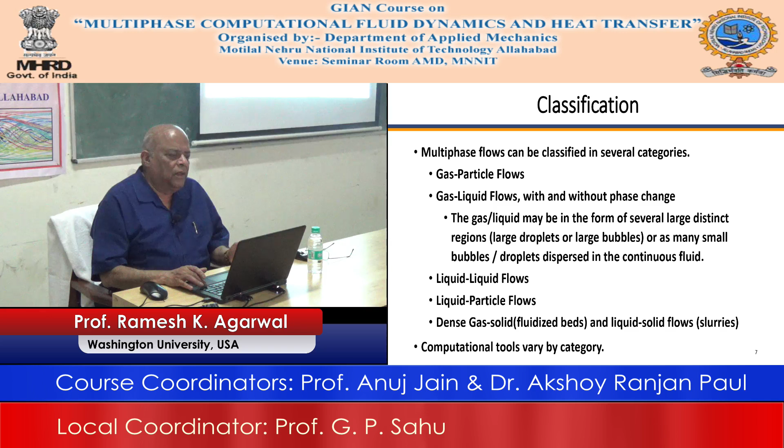Again, some of the terminology that we covered yesterday in lecture 3, including the dimensionless numbers. Some of the numbers that I mentioned to you we will be using today. Reynolds number is the most important in the whole of fluid mechanics for single phase and multiphase, and the other important numbers are the Morton number, the Bond number, and the Weber number, depending on what the calculations are, and the cavitation number if it is a cavitating flow.

So now I will try to not go over this, but the important thing again, if you remember, we spent some time on whether there is a one-way interaction or a two-way interaction. That is a very important thing to remember when you are applying the code, or there is a four-way interaction. Okay. So suppose you have a particle, and I gave you the example of a nanofluid. In the classification of multiphase flow, what kind of interaction was it?

It was a one-way interaction, which means that the particles of the nanofluid were so small in percentage and so small in size, they were in Brownian motion, that when they were moving around, only the hydrodynamics was responsible for what is happening. But the influence of the particles on the hydrodynamics was not accounted for. The particles were influenced by the hydrodynamics.

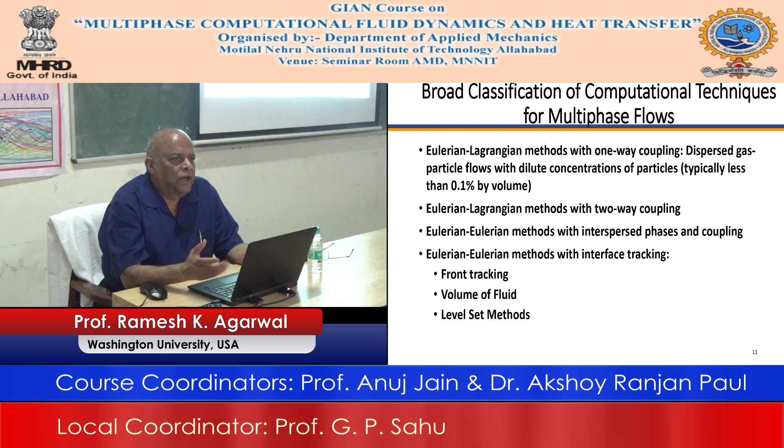Okay. Then, as I said, you can have hybrid methods, you can combine the level set with the VOF and so on. Okay. And of course, somebody had mentioned the lattice Boltzmann method. And then there is a method which has been developed, and some of you might have come across it in some other applications, which is now also a part of Fluent. It was not there before. It is called the grid-free method. So, in the context of multiphase flow, this is called smoothed particle hydrodynamics, SPH, and it's also in Fluent. Okay, and if you want, you can use it in some cases.

The lattice Boltzmann method is not a part of Fluent; it's not there, but people are writing a lot of research papers, a lot of work, and there is a company called EXA, and EXA has a software. It's very expensive. That has a lattice Boltzmann method for single and multiphase flows. Okay, so that is the only software that is using the lattice Boltzmann method. It's very expensive. So I am not saying that you should be doing that, and I think for many of you to learn the simple lattice Boltzmann method will take you some time, unless somebody is offering a course in that area.

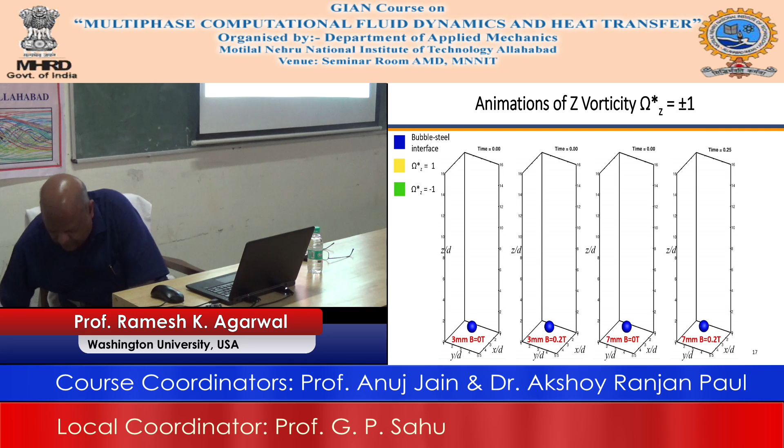So the Morton number is given by the rho of the liquid minus rho of the gas. But suppose it is air and water, it's 1000 to 1, you need not worry about the gas, all right. So it's basically density of the liquid times the gravity times the diameter of the bubble squared divided by surface tension. Okay. So surface tension forces versus the gravitational force. The other one is the Bond number. No, this is the definition of the Bond number, by the way.

And the other one is the Morton number, which is g times the viscosity of the liquid, not the bubble, to the power 4th, divided by the density of the liquid times sigma to the power cube. So anyway, that's not important. The important thing is that these are the two numbers and they are related to the Weber number. And so if you go back to our presentation number 3 or something like that, then you will find that all these are given. There are a lot of numbers, all right. They are difficult to remember because we don't deal with these numbers that often.

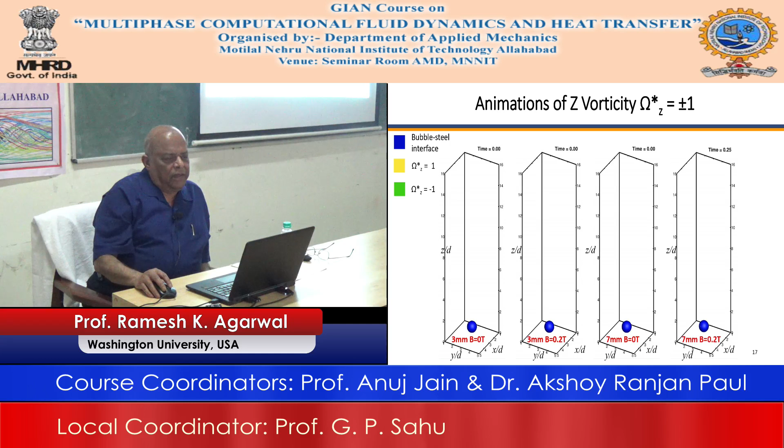If you don't know, they are like a potential and streamline. Those of you who know fluid mechanics know that the potential lines are always normal to the streamlines. So similarly, the electric field, at least in the axisymmetric case, is always normal to the magnetic field. So in this case, the electrodes are going like this, so current is going like this, and so the magnetic field is perpendicular to the screen or the board.

But what you see here, which is more important, is that as you increase the magnetic field, the size of the bubble as it is rising through the molten steel has become very small. This is just a very simple modeling, but in general, there are hundreds of thousands of bubbles there. So by applying the magnetic field, you can control them. So now the manufacturers are using this method.

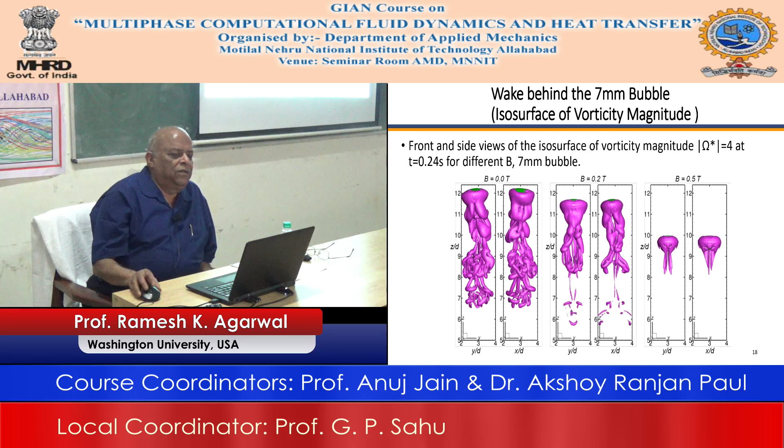That was a 7 millimeter bubble, and again you can see that as you change the magnetic field, there's tremendous impact. These are all blown up pictures, but in actual practice, when you have a large number of little bubbles, it does seem to make a difference. Okay, this is one example. Now let me show you another example.

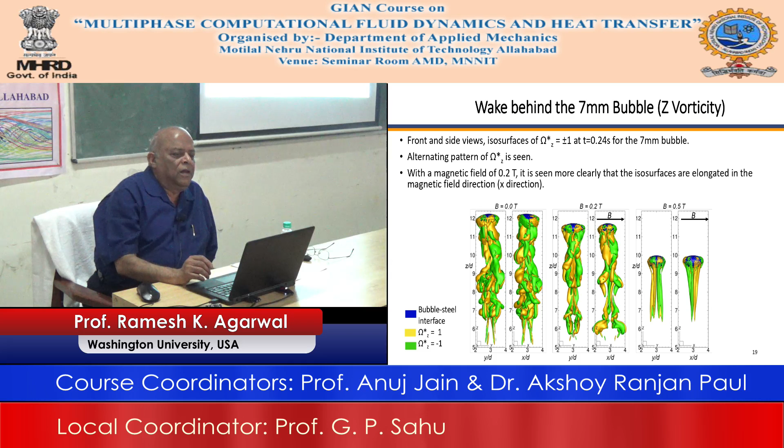And there are two Reynolds numbers that come into play. One is the bulk Reynolds number, which is based on the width of 48 millimeters here. And then you have the bubble diameter one, 216, which is a very small number. And this is this. So now, again you do the calculation.

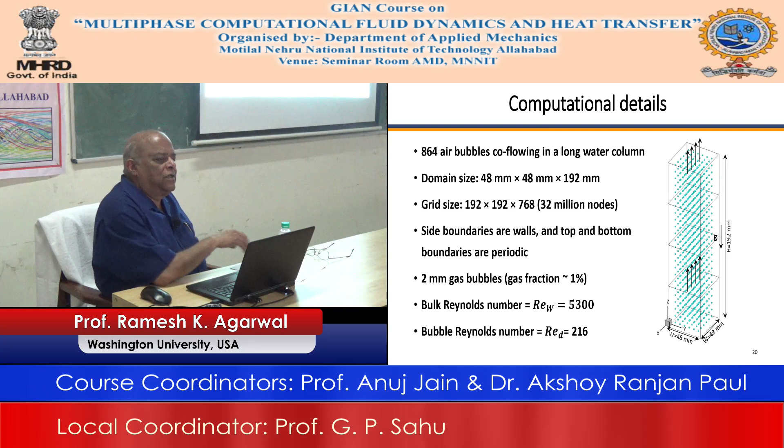But what you find is the difference between unladen and laden flow: if you have a laden flow, which means the particles are there, then the behavior of the bubbles can be totally changed. So you can completely change the physics in the case of the formation of steel ingots and removing the bubbles. So it's a very practical and important problem that you can figure out with simulation. All right. So it has a lot of merit.

And in the other case, you can sprinkle some particles randomly to make the flow a laden flow, and those particles can make the bubbles inside the flow behave completely differently. So all these are practical effects depending on the application that you're looking at.

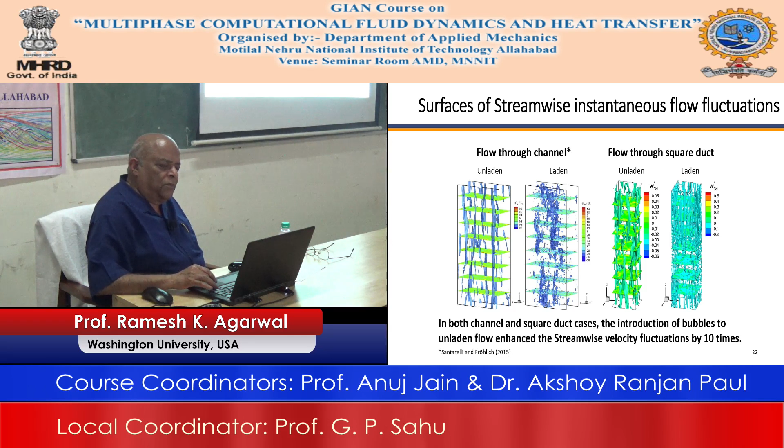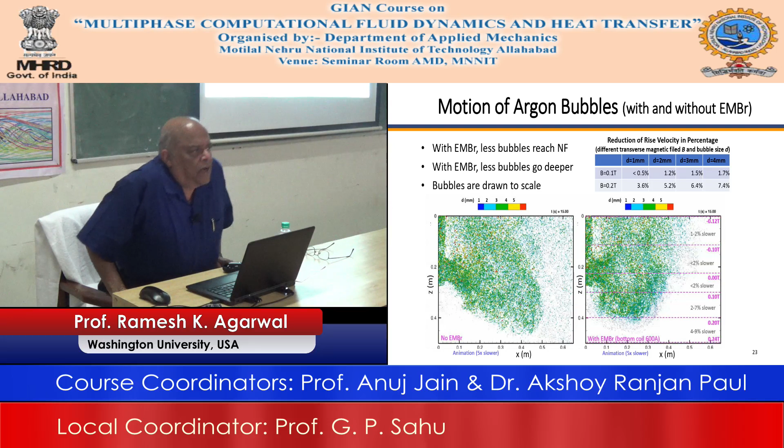So I think these are motivational examples of how in various applications you can do some really useful things. I showed you a few of them, and they are all done with the help of Fluent. Now, by the way, a few years back, Fluent did not have the capability of magnetohydrodynamics, so you couldn't do calculations that require electric and magnetic fields, but now they have it. So as they are building up the capability, you can do it.

Okay. So somebody was asking me today, can I do all this in the open source, not what I am showing you? And I said you can do anything you want. You can start from scratch and build up the code. It depends on how much time you have and what your motivation is. People can do anything they want, but remember that there are certain limitations: there are only 24 hours in a day, and you have to eat, you have to sleep, right? And you have other commitments too, and then you can calculate how much time it will take, and how many times you have to be born to get it all done.

So, yeah, yeah, yeah.

Okay, so I showed you the continuity equation, which has these terms here, and I will not bore you, because if I continue with this, a lot of you are not familiar with it and will wonder what it is. So for this staggered grid arrangement, let me see if there is a blackboard to explain it to you quickly.

So if you have a one-dimensional problem or three-dimensional problem, suppose this is your mesh. This is one-dimensional, a simple uniform mesh, and the one-dimensional analog for the momentum equation, with the pressure term, you can add the viscosity if you want. This is the one-dimensional momentum equation. The one-dimensional continuity equation will be simply this. So you can try to apply the Patankar-Spalding algorithm here.

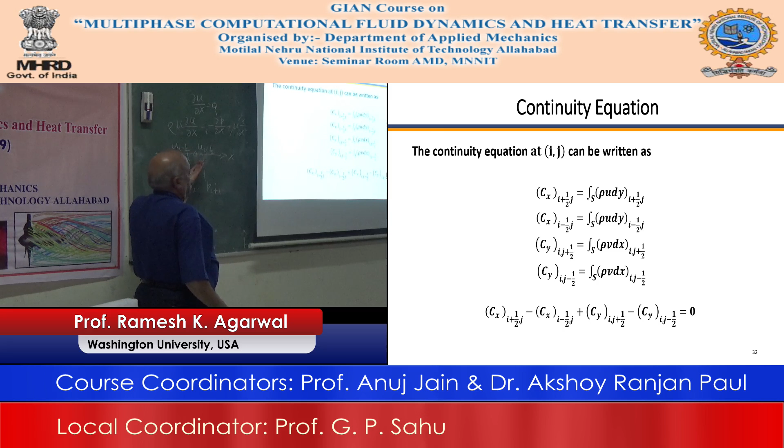The main thing to remember is that the pressure is calculated at the grid points, and the velocity is calculated here. So the velocity is driven by this pressure difference. In the y direction the same thing happens, and in the z direction the same thing happens. So you can take these equations and write them down for conservation of mass and conservation of momentum, and put it all together, you will have an algorithm. There are some other small details, and that is the staggered grid.

So the staggered grid means that the grid on which the pressure is defined is the actual grid, and the other one where the velocity is defined is not an actual grid. It is one you have numerically created for convenience, with u at i minus half, and you can take care of it later on after you have written the algorithm as this.

Okay. So you can work it out, and this algorithm is so famous that if you go on Wikipedia, it is written there. And this is the SIMPLE algorithm. SIMPLE stands for something, but if you want to experiment with it, and many of you have not taken a course in CFD or want to learn yourself, you can take the book of Patankar, or any other book, and just go over that section, and it's relatively straightforward.

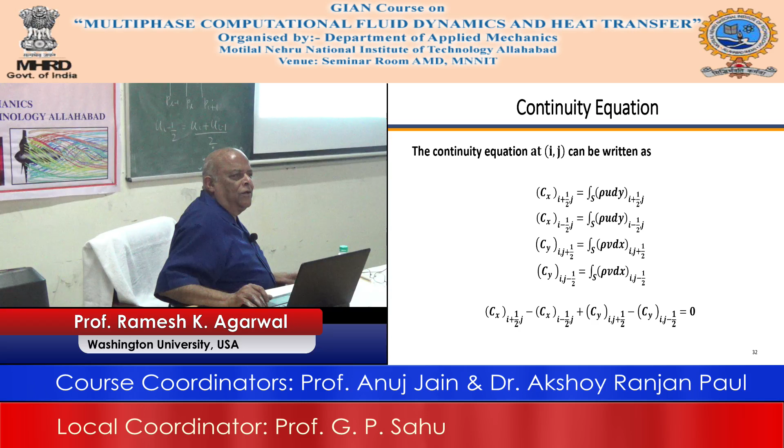And now you can go to the momentum equation, and you can do the same thing. So x plus means i plus half comma j, x minus means i minus half comma j. It is just written for brevity so that you don't write too much here. So the x plus is i plus half comma j, and x minus is i minus half comma j. So you can do all this. I mean, it doesn't take that long actually to do it. But once you put it together, then what are you going to get?

You are going to get a large number of algebraic equations. So even for a rectangular grid or a square grid or cubic grid, in 1, 2, 3 dimensions, if there are 100 points in the x direction, 100 points in the y direction, 100 points in the other direction, then 100 times 100 times 100 becomes 1 million. So we will have 1 million grid points. So how many equations will you have? 1 million. All right. So how many of you can solve those 1 million equations?

If you do it the old fashioned way that you learned in 5th grade, how many years will it take you to do it? You will not be able to do it at all. You know, I cannot solve a 4 by 4 matrix. The point I am saying is that all the partial differential equations have reduced into algebra, and now you have to figure out how to solve the algebra. And there are easier ways to solve the algebra. People have been doing it with 30 million grid points, 100 million grid points. So that becomes a separate problem.

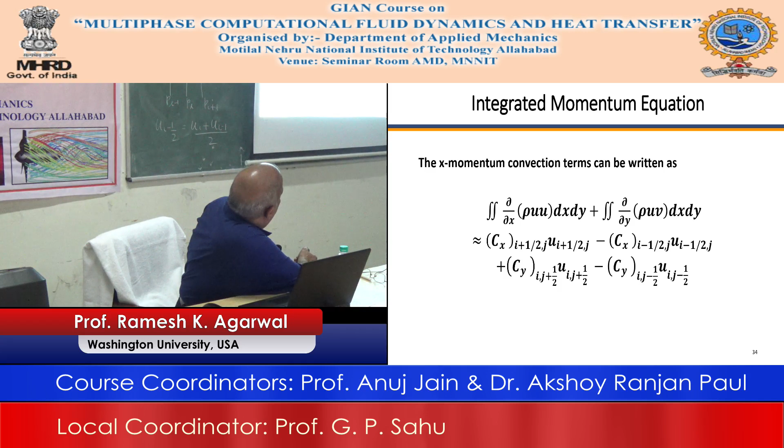So the momentum equation basically takes this form. So the other one you saw, now you have this thing here. So you will have equations of this type. You have a convection term, and of course momentum is a little more complicated. Then you will have a viscous term, but as I told you, the middle of these, i plus half, is nothing but an average, just like I wrote down here. So eventually everything is on the grid. This is our grid, i minus 1, and this is our main grid that you generate by ICEM. These other things are artificial, and that artificiality is eliminated by this definition.

So everything that you have is on the grid, but why do you have to do the algorithm in the way I am telling you? If you do not do it that way, where the velocity in the x direction is driven by the pressure gradient in x, and in the y direction by the pressure gradient in y, then you will get a numerical scheme which will not work. Why it will not work is what is called odd-even decoupling, which means you will have two sets of equations which will not be coupled together, and that will be a disaster because you want to keep them coupled. So that is why you introduce this staggered grid or collocated method. Now if you have never heard this before or never taken a course in CFD, it might be too much. So let's not worry too much, but there are reasons behind everything that is being done.

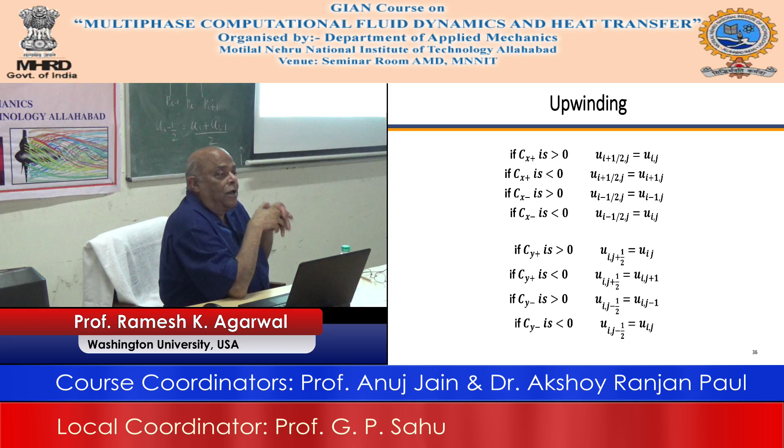Okay. Now there still may be a problem. You will get a solution, but it may not be as accurate as you want. So that is where these issues of grid independence, the order of accuracy of the scheme and all these things come into play.

So now we have these equations in a partial differential form, and what I am trying to convey, if you want to write the bullets, is: take these partial differential equations, write them down so that, let us say, they are second order accurate, that is good enough, on some grid. Then what you want to assure is that the convection terms are upwinded, in a more simple way.

And then once you have done all this algorithm, you have to figure out how to solve the algebra. And let us say keep it simple, so you do 1 by 1 by 1 by 1. And then hopefully everything else will converge if you have done it right. But even then you have to be careful, because there will be a condition under which only it will converge.

Okay. So suppose you have this much and you want to do it fast, and you say I am going to divide into only 4 parts and I am going to be happy. It may not converge because it may be violating some condition, which is called the convergence conditions or the CFL conditions and so on and so forth. Okay. So that is the main thing that you should learn from whatever description I have given you.

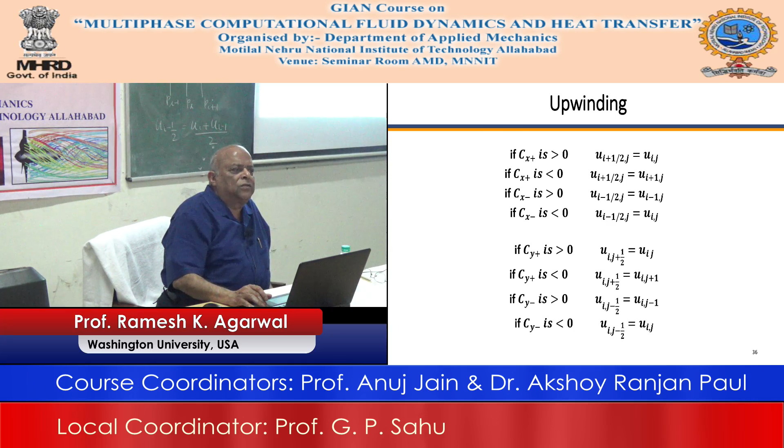Now, diffusion terms are simple, because, as I said, you apply a little force and the fluid flows. This is a convection phenomenon, and the diffusion means that they are viscous, so they try to control the flow. Not that much, they are not that powerful, but they can at least try to control it. They are simple, there is a central difference, and they are very easy. So there is no upwinding at all here. So you can do this.

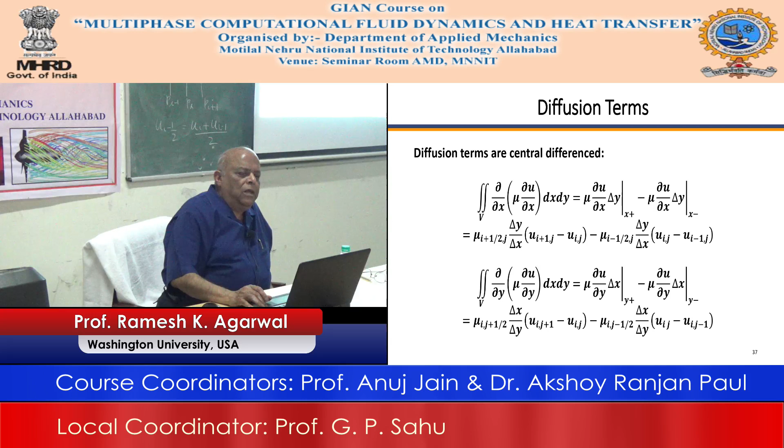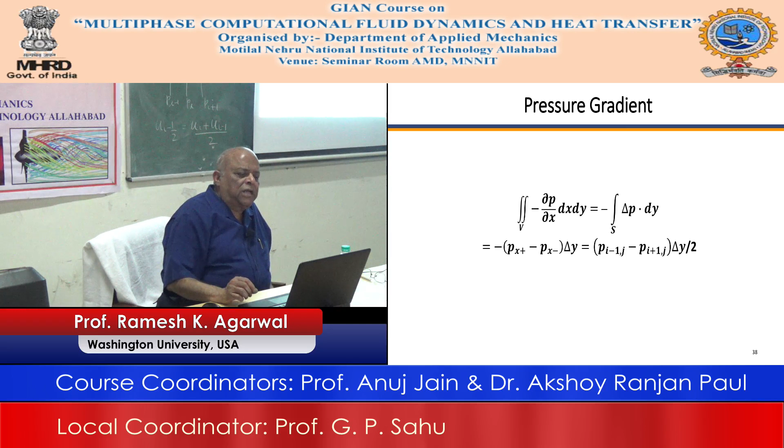Okay. So this is the pressure gradient. Again, you can do it the way that I explained to you, and then because it's a time dependent algorithm, you can do SIMPLE, or here I am showing you another one, which is a fractional step algorithm, which means that you have additional steps, and then you go through this process, and then ultimately you want to satisfy the conservation of mass in 2 dimensions. And that is where the SIMPLE algorithm was a major step to do this.

So I am not going to go into all these details, but what happens is that the calculation at the n+1 time step is written in terms of the pressure gradient, and when you plug it back into the continuity equation, it gives rise to the Poisson equation of pressure. So the conservation of mass equation becomes a Poisson equation for pressure. You calculate the pressure, you plug it back in, you get this value because you have calculated this pressure. This is already known. You now go back to the momentum equations, calculate the next step, and then keep on repeating the cycle.

So this is basically the idea, but there are a lot of tricks, as I told you, that you must be aware of to do this. So I think that this is good enough for the introduction. And we have already spent a lot of time doing that.

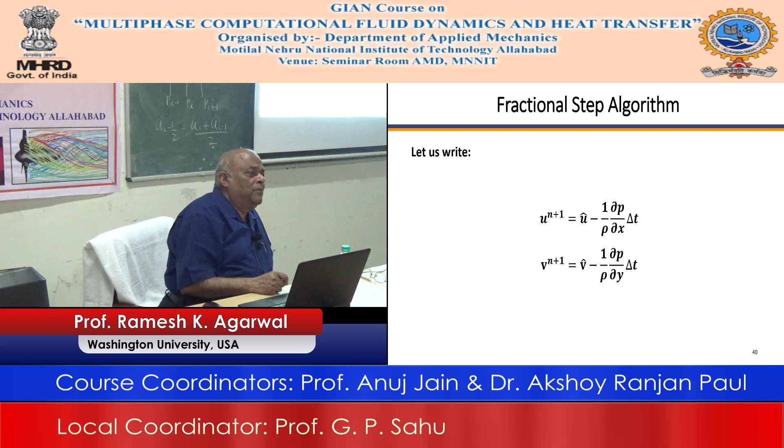But this is applicable to multi-phase flow. That is why it is important. There is nothing in multi-phase flow which is different except the addition of the volume of fluid method and the level set method, if you want to use that. So additional complexity is there, an additional number of equations is there, but they are all solved by the same method. So if you want to write your code in 1 dimension or 2 dimensions, you can do that by following this procedure.

So first of all, you decide the grid, then of course you have a pressure equation to decide the pressure boundary condition, then you calculate the middle values u hat, v hat. I think always use explicit, that is easier. You can solve for these values from the momentum equation, go back to this equation, update the values, and then keep on going back and forth. So this is the SIMPLE algorithm. All of you have heard of SIMPLE. This is what SIMPLE is, and whether you are using a collocated grid or a staggered grid, it is the same thing.

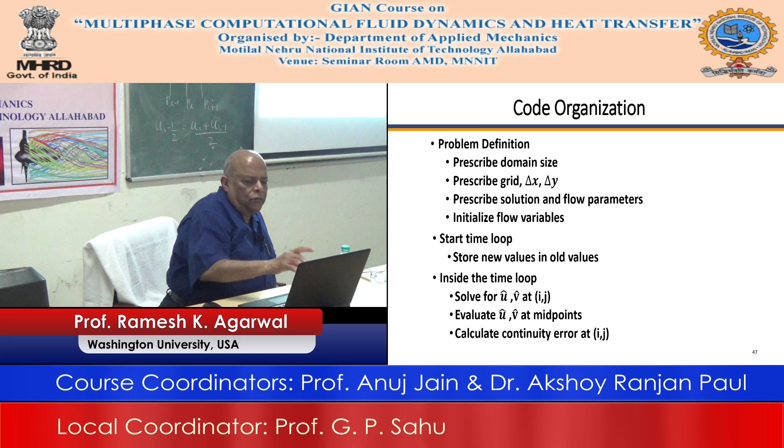And this is again if you want to organize the code, the same thing that I just showed you on the previous slide, that you can have a computational domain, have the grid, and then prescribe the solution and flow parameters. At t equal to 0, you prescribe the flow variables, then start the calculations the way I explained to you. First all the momentum equations, done at the midpoints, and then you plug that into the continuity equation in the form of pressure correction, and then go back to the loop, and then you can get the solution. Okay, so this is the next step, and that's it.

So this is a basic algorithm for solving the conservation equations, whether it's single phase or multi-phase. And in this case, when I am talking about multiphase, I am talking about the Eulerian two fluid model, because both are fluid equations. I am not talking about putting a particle in there. But the complication is there, because if you have air and water or some other things, then you have two fluids, which means that your number of equations is double. And so in Fluent, you can only do two fluids. If you have three fluids, then you need three sets of equations, and that is not built into Fluent. But otherwise, there are hardly any problems of interest that require three fluids.

Okay. So I think that this is a good time to go and have your coffee, and then we will go to the heart of multiphase, how to do the VOF numerically.